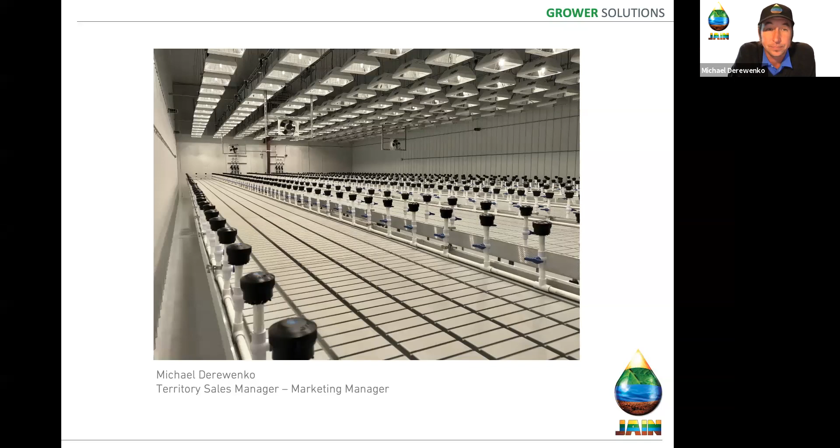Some key details: these are some popular questions we get from first-time growers, and then even some more complex key details for seasoned growers. I wanted everybody to have this slide for reference, potentially after this recording. Cultivation indoors, a good indoor can get 4 to 5 yields every year for cannabis in particular. So we're trying to grow and water as fast as we can without oversaturating the plants, and we do that with the use of a lot of our drip products.

I'm not going to go down the list specifically, so I'll give you a second to read this. Richard, I don't know if there's any questions off the key details page, but this is basically a lot of things we're not going to talk too much more about, just general key details in design of systems indoors.

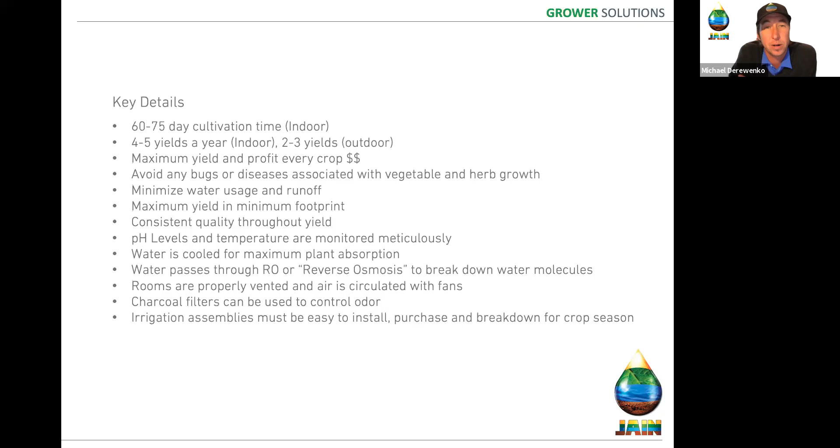So I think the biggest circumstantial hurdle or challenge that we're coming across with indoor growers is the trust to let an irrigation system run when they're not there, at a large scale. Smaller scale, understandable, but at a large scale. As we go through here, you'll see the components we highlight are designed just to do that. Okay, great. Yeah, we're looking forward to learning more about that.

So covering the irrigation topics is our primary goal today, and there's a lot of different options. I mean, at JAIN we make over 30,000 products, so same on the contracting side. I think one of the biggest things I see in our industry is there's so many options that contractors don't really know what's better and what's worse. They become reliant on price point to determine where the quality lies, which is not always accurate.

One of these options that we use specifically is our point source emitters. We use this in landscape too for drought tolerant plant spacing. Basically, when our plants are spread far enough apart that we don't have a consistent emitter spacing that we can apply emitter line or tape to, we're going to actually try to apply water right to the root base. We do that using, in our case, a Click Tif emitter, also referred to as a button emitter. What it's doing, as a pressure compensating device, is managing the water and the flow that goes through it constantly.

So as a pressure fluctuation exists, especially indoors—usually because our valves are on the wall or on the floor—we're seeing, not necessarily air gaps, but a little bit more turbulence in the laterals and the lines than there would be outdoor, buried with the security of dirt around it.

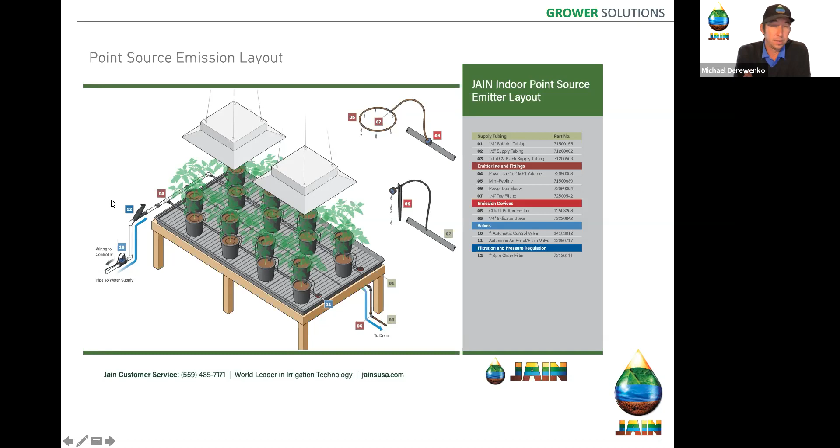And as you saw on that last slide, those are illustrations that we have on our website. We have 4 or 5 different versions that we'll cover a couple of, but they all consist of the same components—once again, very familiar products that we use a lot of the time. I'll go down the list and talk about their priority.

I'll work from the primary side out, which is the first component that sees water in an indoor system, just like an outdoor system: a control valve. Ultimately, we want to be able to control water automatically. We don't want to have to go out there and turn a faucet on and off, or a ball valve on and off.

Typically we're going to spec this product even if you are going to manually bleed it first, and then down the road hook up a controller to it. It's referred to as a solenoid valve as well. This is a 1-inch version showing indoors when we're watering benches. We're typically not using giant 2-inch valves or 1.5-inch valves—that's a lot of water for a plant that doesn't need that much, or for most plants that are growing inside. I don't want to keep referencing cannabis, although that's probably the topic a lot of people are interested in.

So we're going to start with the control valve. This is not only the automation, but this is going to control the hydraulics throughout a room. On that first slide, there's 6 benches per room. We made each bench its own zone, just like we would a hydro zone in an irrigation system outside, and we do that with the use of these control valves.

The solenoid on top of that valve is what accepts a 24-volt low signal from a controller or an automated system, that's going to make it a little easier and consistent to water. Some other components we're not really familiar with outside in landscape irrigation are RO systems and some cooling systems. A lot of plants inside are under a lot of directional light—they're getting 2 to 3 long cycles of light a day, more than they would outside—so we need to cool them, and they like cold water, just like any other living creature.

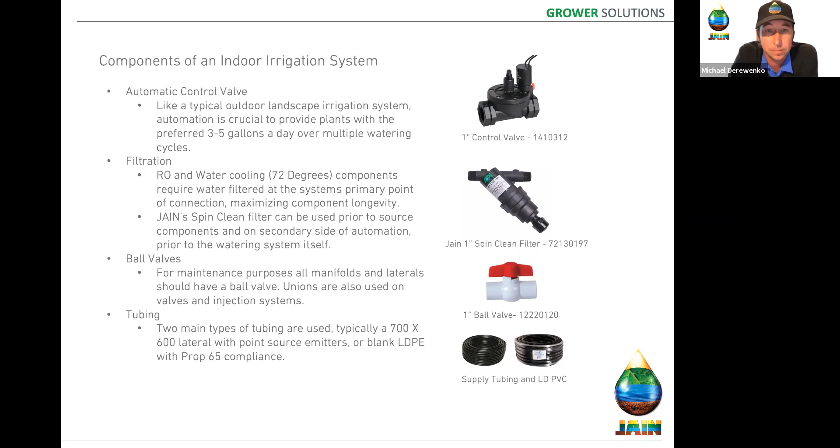I think that's a great point, Michael. A lot of people just assume that recycling is the best sustainable practice. But if you're using three times the material by going with a recycled product versus a 100% virgin resin that's going to last 10, 20 plus years, it's sometimes better to go with the non-recycled product. I think that's a hard concept for people to get, and I'm glad that got presented.

Yeah, I want to talk a little more about tubing in a second, because just because we're running water through it, just like PVC, we sometimes don't spend enough time on it. This particular slide is about mounting small diameters of tubing, whether it's over rock wool, coconut, or whatever growing medium. We need to be able to hold the tubing close to the surface. Or even if you're using a tray on top of the pot, you're still going to need something to hold it. So we have a couple staple options here—there's 6, 7 different options. Always ask questions of your local distributor to see if maybe there's a better one, because just because it's not on the shelf doesn't mean they don't have a better option at their disposal.

Fittings and flush points. Fittings are crucial—locking fittings inside. You're going to have to use a lot of barb fittings with clamps on the vinyl tubing as well. You want secure connections, and we do that with the use of a Power Loc Tee, which is our series. Then we want flush valves. We talked about maintenance—how do we keep our screen filters from clogging all the time? Disc filters and screen filters all require maintenance. Even if you have a controller on them for auto flushing, you still need a flush point. In our case, this is our handy dandy automatic combination air relief valve. It comes on at the beginning of the system cycle, and then it turns off when the system's charged.

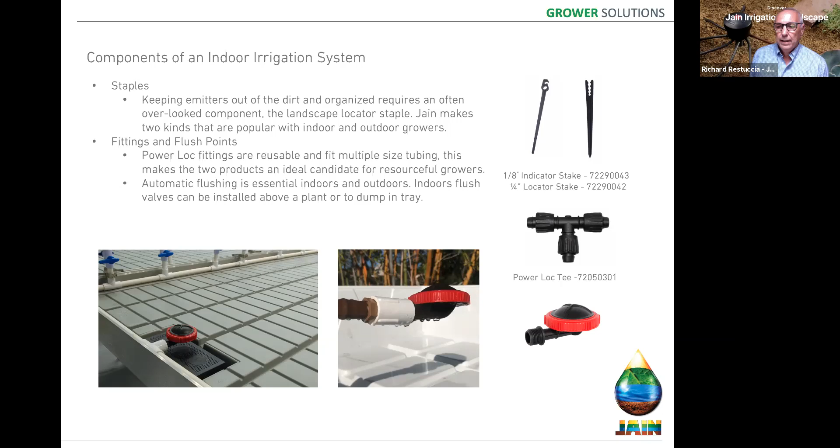Yeah, that's a pretty unique view, right? We wish we could get that outside, to really be able to see what was in your irrigation water. If I could get contractors to put pea gravel underneath them outside, I'd be excited. But I'll take them buried for now.

But we do mount them. There are some surges - our pipes aren't protected by dirt anymore, so they move around, and we're moving up to 40 to 50 gallons per minute sometimes. So we use surge arresters throughout the system and mount and bracket anything we can.

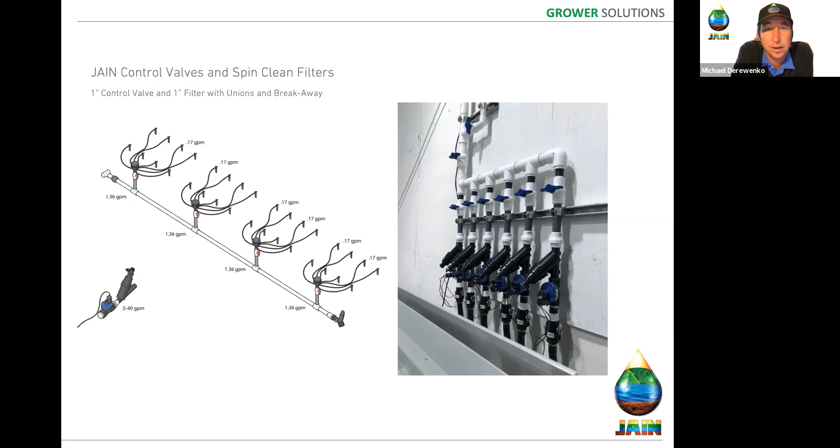For the size of the systems, for cannabis in particular, a system, as you've seen in these diagrams, ranges from about 8 Octa Bubblers to about 500. But on the smaller systems, which we see the most of, they're using the 10 gallon, the red dotted Octa Bubblers, by far.

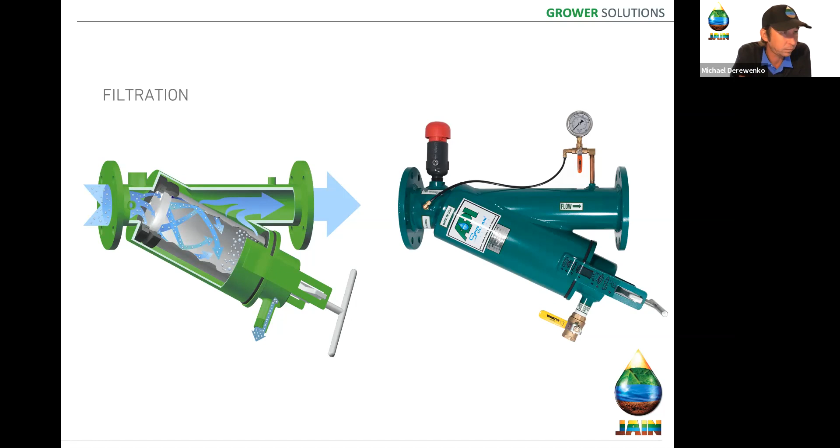If you don't know what Prop 65 compliance is in the state of California right now, then you're potentially selling something that someone's eating tomatoes out of with poison in them. There's liability there. We're hearing of growers, contractors, and even distributors getting visited by lawyers because they're looking for people to find fault in. So we make Prop 65 compliant products. We broke it down, and we use Dow resins, virgin resins, to make sure it doesn't have any lead content in it, so you can eat whatever you're feeding through it.

Rigid PVC is already compliant because it doesn't have the porous surface, so it doesn't have the chemicals that can get stuck in it like a lot of the vinyls and flexible tubing do. We really want to make sure that everyone's growing according to local rules and laws, and we do that with Prop 65 compliance.

Foaming agents and fillers are just a way for manufacturers to get around selling a more virgin resin product. With more virgin resin, we go from 95 to 97.3 on our product with some UV additives only. That's about the best you can get, and it's going to last longer. We'll talk about the recycling argument here in a second, but we use quality resins, which leads to a long-term product.

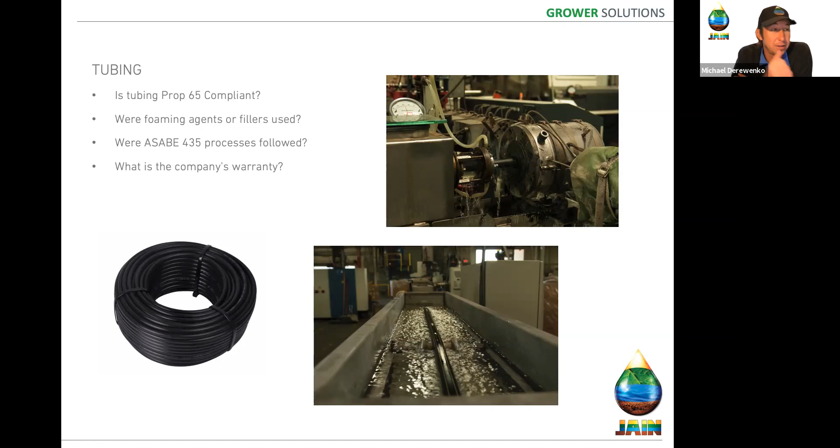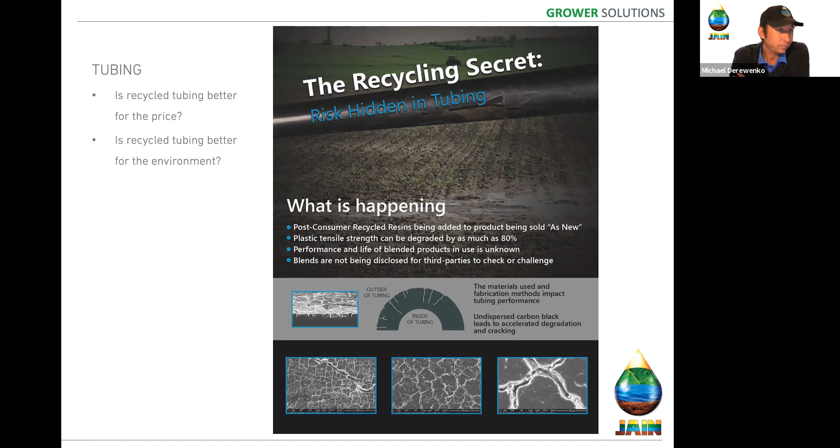We're using a couple different stakes depending on your growing medium to apply water right to the root base. We know exactly how much water is going out. We know exactly how much water the plant's getting every day. And these consistencies help for our nutrient budgeting and our water budgeting, which ultimately leads to good savings in water, savings in overhead.

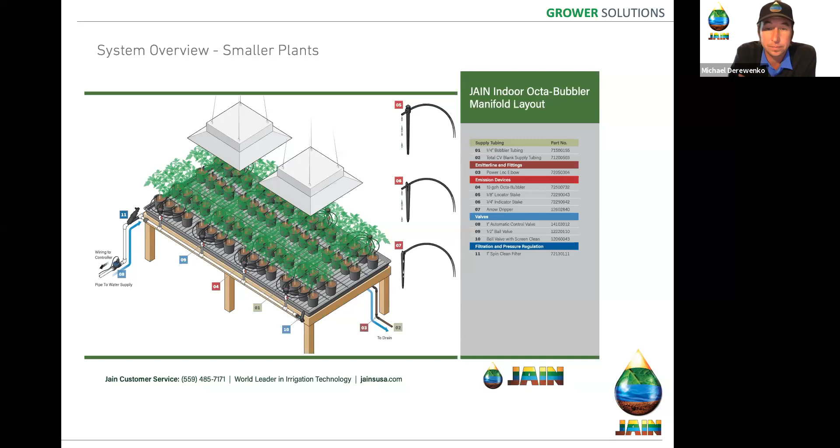There's a couple facts about the Octa Bubbler there. We sell tens of thousands of these Octa Bubblers, a lot to growers. So growers are very familiar with this product. They know that there's a repair kit for the inside. The inserts can be switched out. The ports are swivel, and they connect to 1/4-inch tubing.

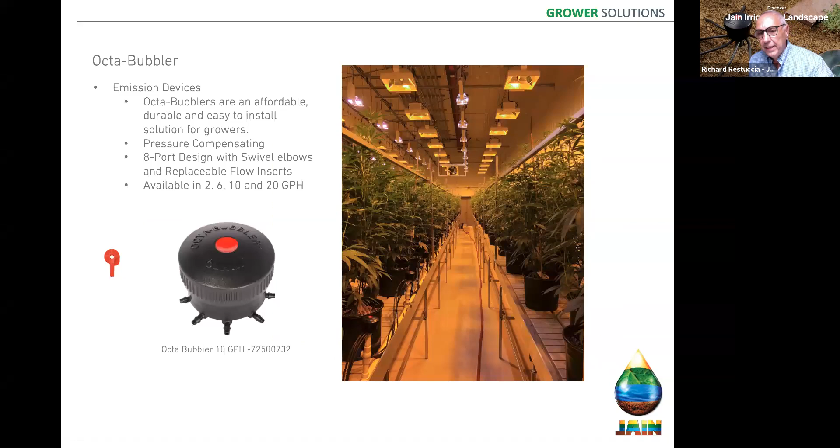So Michael, on those tables we just saw, and maybe on these too, I don't see any wheels on the table. Do they sometimes put wheels on the table, and how does that change things?

Yeah, so that's my next slide, I'll get there. But once again, we talked about the expense of electricity and water. Another one is labor. We want to try to reduce that, and as we visit these grow rooms, especially myself, I see teams of 5 people over the course of 2 weeks assembling these manifolds for this giant project. This is something that we can absorb.

And what we did is we make these Octa Bubbler manifolds, where immediately everyone watching right now is like, well, I can screw an Octa Bubbler on a riser and a ball valve, and why would I want to pay you an extra dollar?

Well, when you're doing it 14,000 times and you've got to get them in the ground, why would you not want to rely on a resource like this? So what we've done is make a few different versions: 1/2 inch, 3/4 inch, 1-inch T, and different riser heights depending on your table. So when you purchase it, you don't have to purchase the components separately. You can just purchase them as a whole, get them out there, glue them together, and you're up and running.

Any labor that we can reduce on these sites is valuable, because they are very labor intensive when the installation starts. They have enough of a task with the mounting and the preparation of the manifolds. The last thing they need is something like this that they have to do over and over. So we make these different manifolds, and that's what you see at this site. I think we used about 13,850, if I remember correctly.

Yeah, it's fun the first time to put it together and you go, oh, that's how it works, that's cool. And there's a lot of different components too. So one, it's not fun after a while, right? And it's a lot of labor. Two, I always come up short a few components here and there, and I'm going back and forth to the distributor to get more. So this is a great way to save that part of the labor too. I mean, it's a lot of Teflon tape. You're screwing a lot of stuff together, applying a lot of Teflon tape. It adds up.

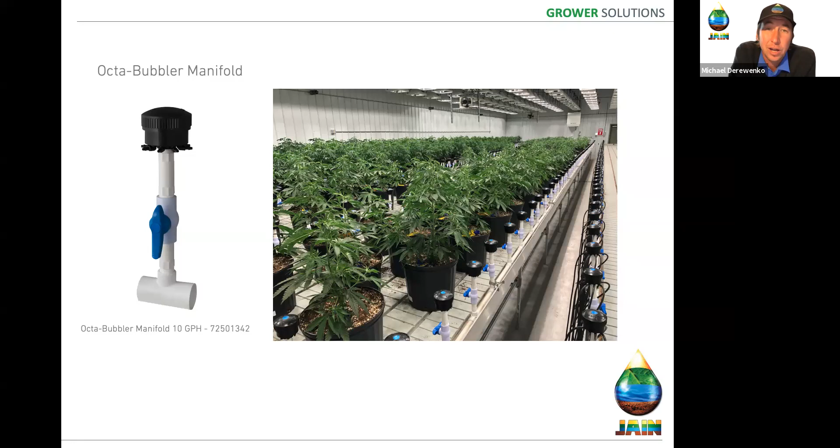When we're trying to support something, it's way easier over the phone to say, hey, go turn off 10 of these. Do the other 10 work better? Yes, they do. Well, then we figure out what the problem is pretty quickly. So being able to isolate different areas of the table and the project makes troubleshooting in the future a lot easier.

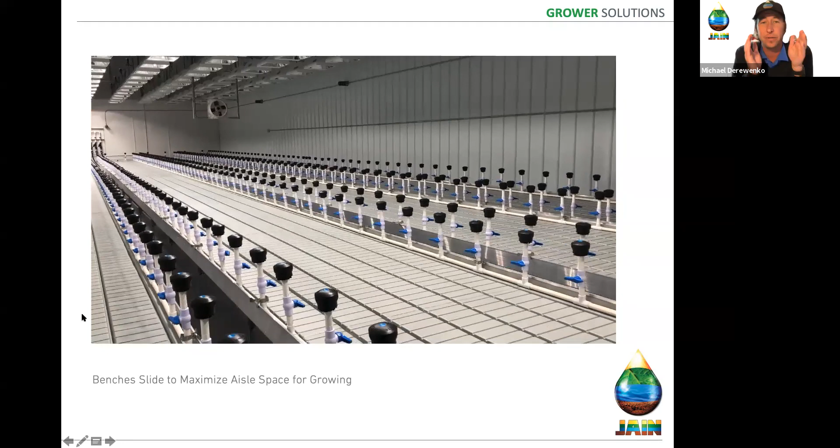And so, Richard, you had asked about a rolling table. In this case, these benches actually slide back and forth, and they eliminate any space. Square footage is money, and this particular site did not want to waste any. So all these aisles, all these Octa Bubblers, once the plants are in, you'll see how the lighting is spaced off the side of the walls. All of these connect together in the middle with no aisles, and when harvest time comes around, they're able to slide them all open one at a time to walk down the line and harvest the plants. The Octa Bubblers are just mounted inside the sliding tables.

Because we're using flexible lines at the end, it can move back and forth, so these completely move independently. They can also turn off each zone and switch them out, because sometimes they're only growing half a room at a time. So once again, it all comes down to isolation. Kudos to that planning, right? More yield per square foot, less rent, and more yields. That's a great way to go.

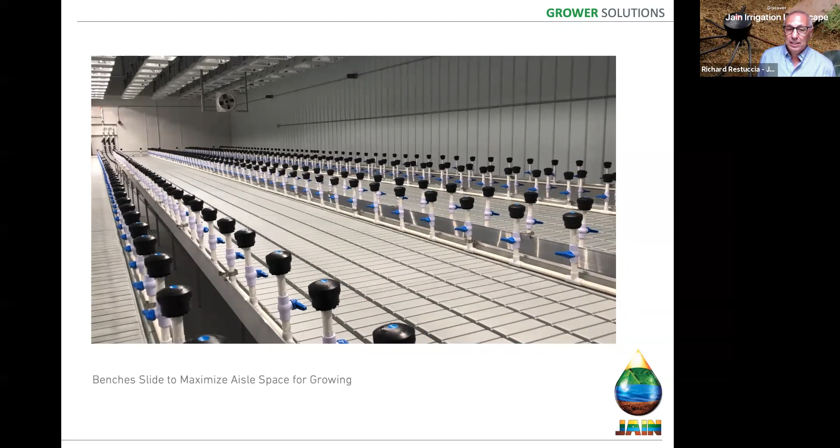It comes down to what we talked about, the liability. With the fire codes, I'm not a fire expert, but basically all these walls had to qualify for some form of fire resistancy, and the lights have to be a certain spacing from the wall. When we do that, it changes the dynamic of how the benches are spaced throughout a room. Now the benches cannot be up against the wall. They have to be away from the wall when the lights are at their hottest, because you'll just start cooking the wall.

Not to mention that white radiates so much heat that a lot of these rooms, the tips of the plants on the outside will get yellowed or burned because of that reflective heat. So you got to take that into account.

By optimizing your lighting and moving everything in under the lights and the canopy of the lights, you're keeping the outer part of the room cool. It also helps with the ventilation. You can see the fans up above.

As much water goes in the room, you don't want too much humidity, so we're trying to control some of the atmospheric moisture. We do that with a series of fans, controlling our lighting, keeping our canopies closer to the centers of the room, and ultimately controlling the water. If the pots are full of water all the time, you can only imagine the relative humidity in your room, as opposed to water that's safely flowing through the plants and out the ends.

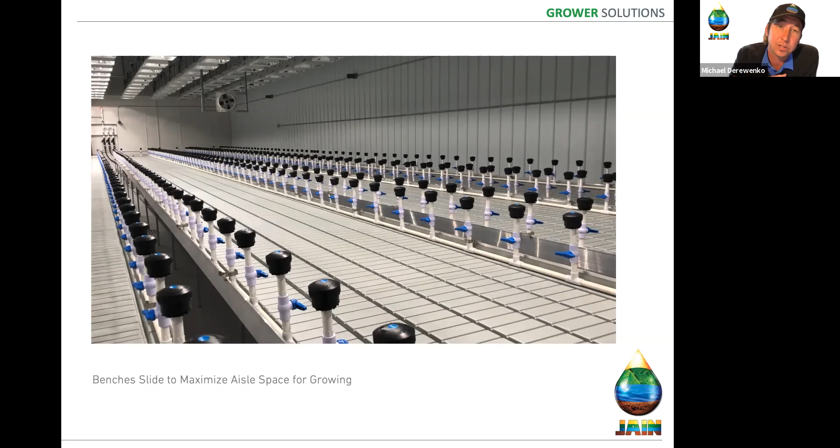Other popular items are our point source emitters. These are pressure compensating emitters, and they're take apart emitters. The nutrients we talked about earlier can clog emitters, so sometimes maybe you want an emitter you can take apart. We have great take apart emitters to use.

So moving away from the valve, moving through the filter, the regulator, the emission devices—the most important thing with all those things is we know exactly how much water they output, but the only way that matters is if we know how long we're watering each one of them. So now that we know how many gallons of water per hour or per minute our emission devices and valves are allowing to pass through them, we need to control that with our water window.

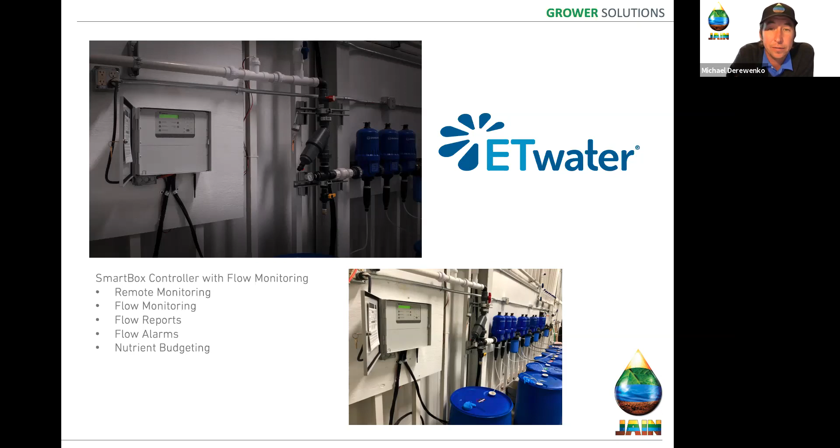They have a huge amount of control, as you can see in these manifolds.

It's so interesting. When I first talk about ETwater controllers for indoor grow rooms, people would say, wait, isn't that evapotranspiration? Isn't that an outside thing? But as soon as you started talking about flow, you could see the benefit and the value to them from a safety and insurance standpoint, it's huge. If it stops high flow from a break, or low flow from a little leak, the potential save to damage is worth every penny and a lot more.

Outside, ET is obviously one of the primary priorities for us, especially with smart controllers, and the SmartBox is going to do it better than anybody. But inside, there's still a plethora of features we can use that controller for. Not to mention, these guys have a lot of their mother plants outside, and they're able to check the local microclimate weather from their phones when they're not there. So they use it kind of as a weather service while checking his irrigation cycle from the night before and his flow, seeing how cold it is 20 miles away at the site. There's a lot of benefits to having a true smart controller on site.

Break and flow - I don't think I'd want an over-the-counter flow sensor when I have 12 rooms and $3 million every season worth of yield trusting in it. So a smart controller upsell is a very easy one. Not to mention with the scheduling complexity, very few software can do the kind of complexity we need with fertigation and whatnot, and the controller fit perfect.

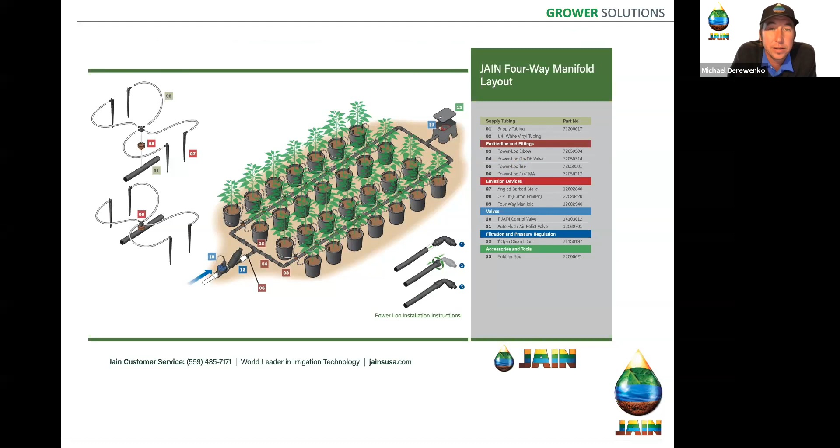When we consider indoor, and I provide support to indoor, we have hoop houses. Some growers are growing stuff outside before they bring it inside, waiting for everything to get nice and big. In hoop houses we can distribute water a little more carelessly, maybe a little overflow in the pots, apply a bit more water than necessary. But ultimately it's a lot of the same components, and I've tried to outline that here in the illustrations. We can break down off a point source emitter 1, 2, and up to 4 times for 4 plants, get them nicely propagated, and then potentially bring them inside for a longer light cycle, or leave them outside. As you can see, very similar components.

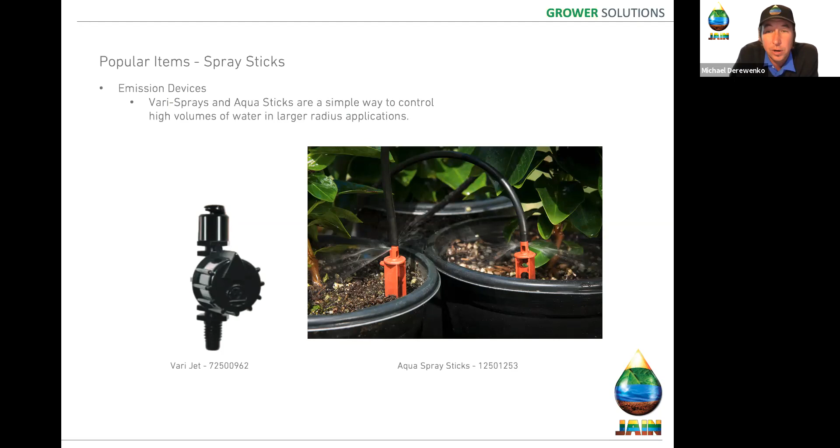Some other ones we'd use outside, not inside, a lot of the hemp growers as well. We want to apply as much water as fast as possible to the biggest square footage or footprint around the base of the plant. So we'll use a series of vari jets and what we call our aqua spray stick, which is a non-pressure compensating stick of water - you can put 2 on each side and quickly put down a lot of water.

Everything I'm seeing here too is showing me labor reduction. That's what I'm thinking every time I see this. I think that's great, Michael.

Hand watering - the main reason people hand water is because they either don't trust or know enough about the technology behind irrigation, so they continue to do it. Or they really like hand watering and paying their friends to hold a hose all day. I've definitely been the bearer of bad news, coming in to automate systems and seeing 6 to 8 of their best friends from high school get laid off. But when it comes to capitalizing on these opportunities, you've got to try to reduce labor and water consumption as much as possible. With something like this we use our JAIN jet, a very popular sprinkler in the ag world, especially for getting pistachios and almonds in the Fresno Valley up and going. We can add a little cap to it and put it on top of a stake, and use it outside.

It's not going to be compensating down to the droplet, but maybe you need to apply a lot of water in a 100-gallon pot really quickly to a mother plant. You can put a couple of these around it and basically flood water it.

The other thing that's important is the accuracy, right? When I'm hand watering stuff, my mind gets distracted. Did I water that plant or not? So do I skip watering it if I'm not sure, or do I water it double? I appreciate the improved accuracy too.

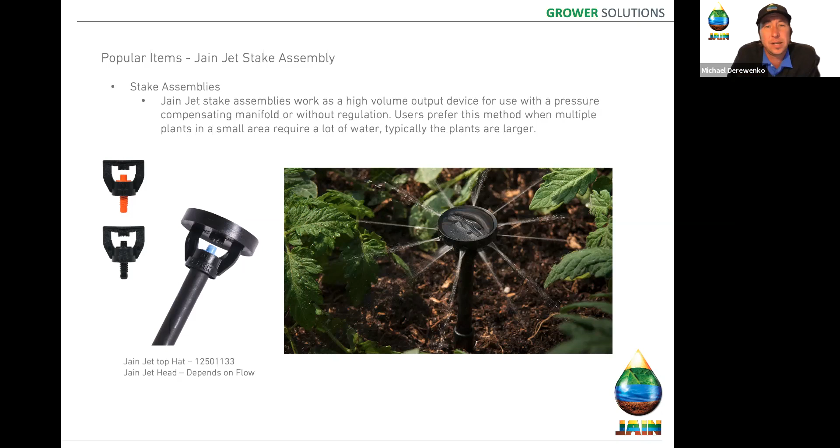Hey Michael, we have another question on the ETwater controllers from Narinder. With the ETwater controllers, if the ET function is not used, what's the scheduling criteria for these smart controllers then? What do they do? Well, in the ET system, or the Unity platform, which is the software that runs these controllers, if you're not using weather, you just simply turn it off. It doesn't have to be used by any means.

On this particular site, they're just putting in their own schedule. We did the math up front—we put in all the variables, precip and flow and whatnot, just for the flow alarm reasons. But as far as the weather data actually changing the schedule, we've just turned that function off. We've turned flow on, and you can still see the weather in the preview, as I mentioned, it just doesn't apply to those particular stations.

They have an outdoor area that we're going to run off this at one point, and we'll turn the weather on for those stations. So just because you have 15 zones inside or 20 zones inside and 20 outside doesn't mean you can't apply the ET formula to just the outside zones and not the inside zones. That's what we're doing right now—we've turned off ET functionality and we're just using flow and manual scheduling.

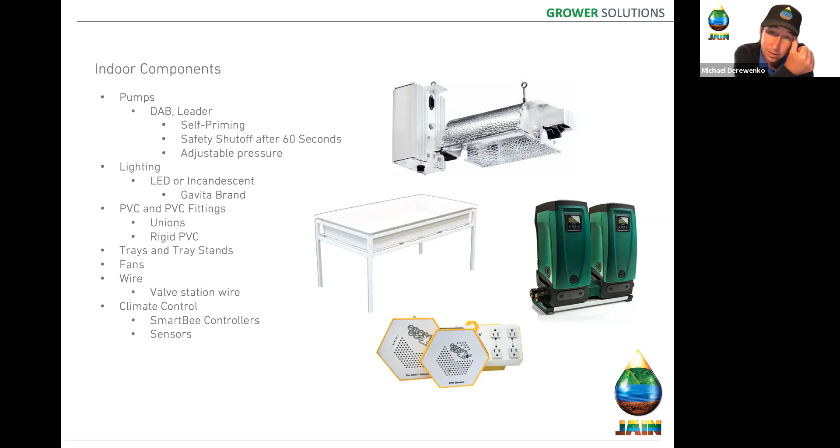Fans, trays, wire, all these things, PVC, all need to be mounted properly indoors, just in case there is a break. There's no electrical liability.